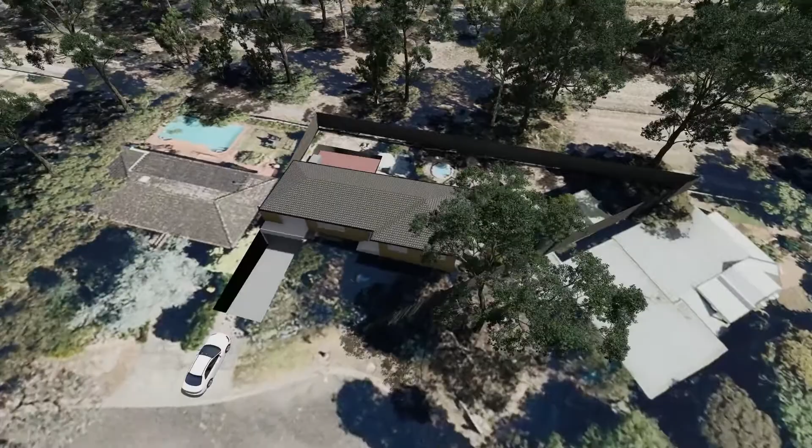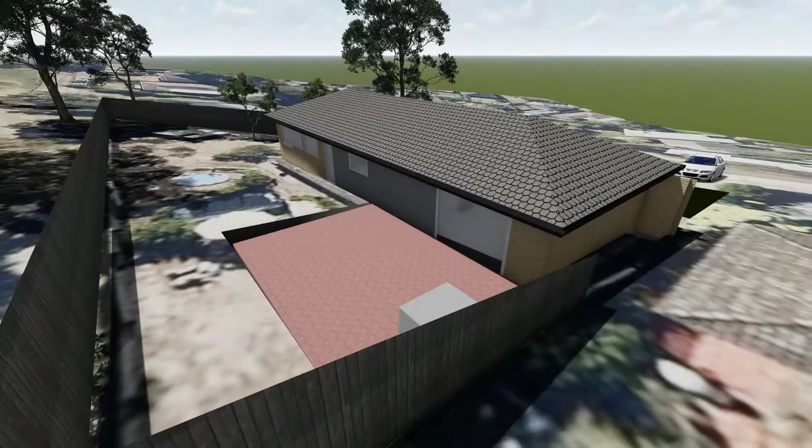Craig, looking down at your current house at the moment, you know this property all too well. Three bedrooms, and then the extra space that's been created downstairs in the garage. So, one of the implications about going up is the plans and the ideas that you've given to me are not quite going to work as nicely and cleanly as you'd like. So we've got a bit of a problem.

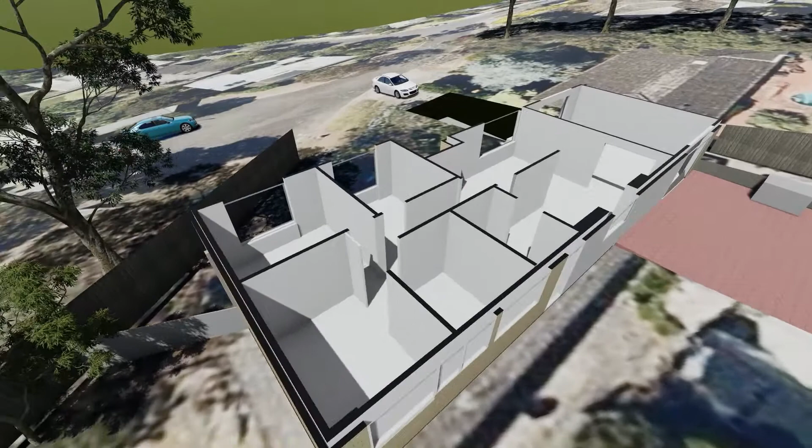Here are the three bedrooms at the end there, Thomas and Talia and Ruby's room. And as you know, Thomas and Ruby's rooms are small. Talia's room is pretty good. 3.5 metres by about 3.2 metres is a good size average bedroom. And if you could make bedrooms bigger than that, then terrific.

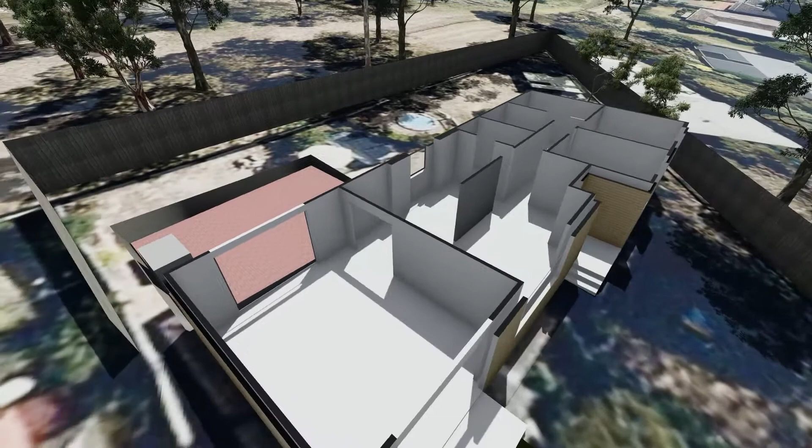The living room's in here and the kitchen, and that wall has now sort of become subject to change with this new design, and I'm going to take you through that in just a second. And one of your ideas was to utilise that giant concrete piece of floor that comes out over the carport and the garage door, and put a set of stairs in there and go around the corner.

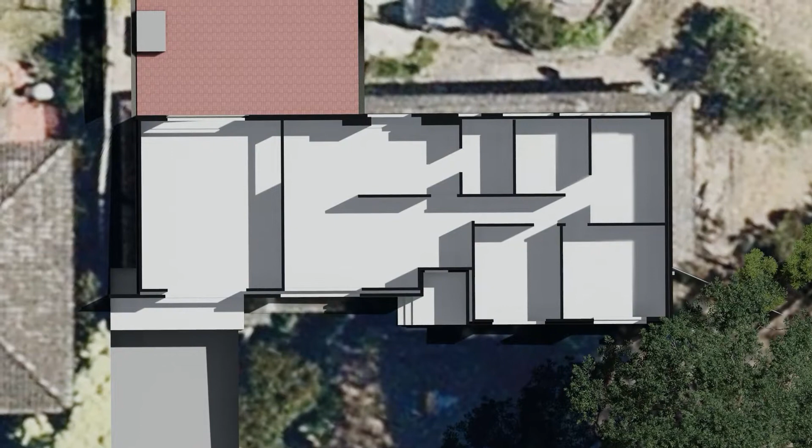But you can see in this plan elevation in the photos here the proximity of the house next door. And I think one of the things that hasn't been considered in that proposal is what the building regulations say as to how close you can build to the boundary. And I'm going to demonstrate that. So what I'm going to do is put the concepts that you've put forward to me into the model and just demonstrate how they can't work.

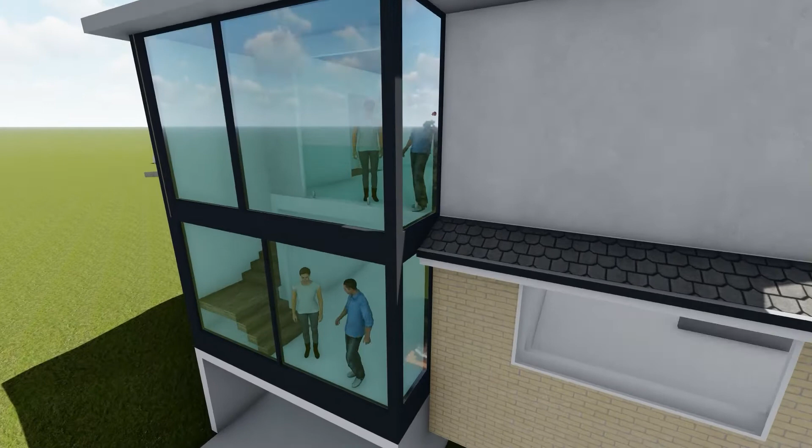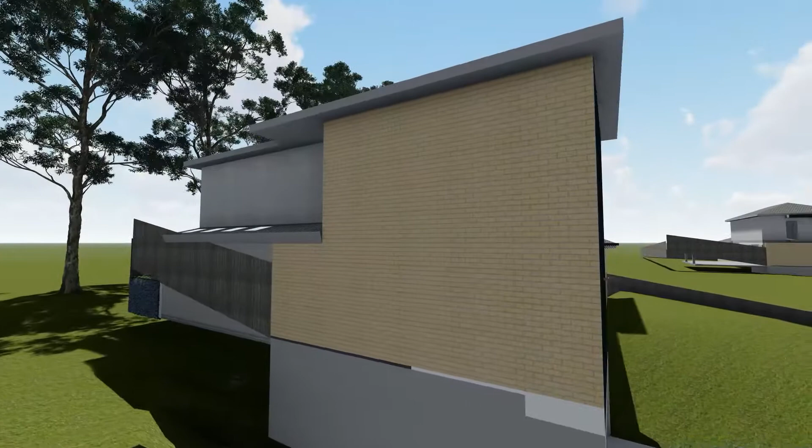So here's the first one where I followed your design. I brought the stairs around the corner, right to the front edge of the garage door there, and you can see I've just gone straight up with windows above the garage and sort of resting on top of that concrete slab. And you can see we've ended up with this giant wall on the boundary. The roof at the moment is hanging over the boundary line. It's a big deal. And then I've come out this way.

This was one of your options with the bedrooms coming out here, and I'll show you why this doesn't work. I mean, it was just too small. It was 5 metres wide, and really that puts the bedrooms at about 2.5 metres wide each, which is really, really tight. In this particular design, what I did was I took the line in the original house and I put the second story back to that line there.

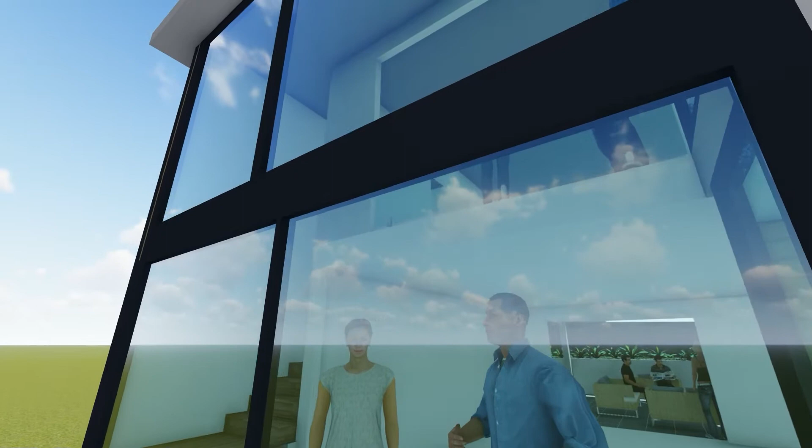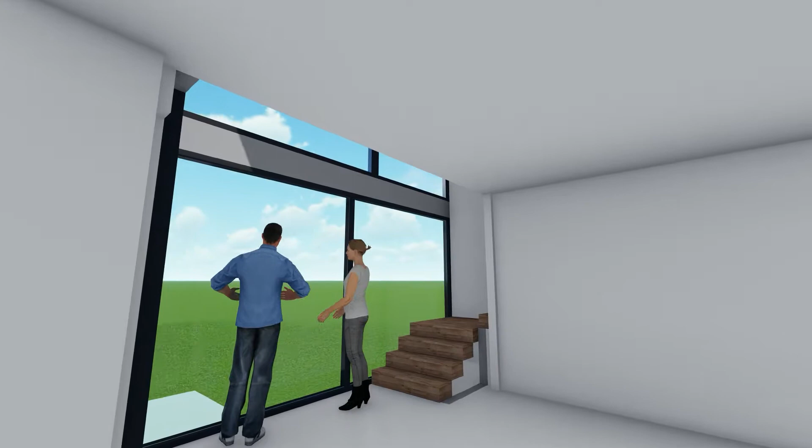So what we've done is we've created this really tall window. So the height of the windows is effectively the two stories. So that just lets loads of light in. And of course, this is the south side of the house. The stairs do their little wrap around the corner here, and what that means is the height at the back of the stairs where it comes into that room is brought forward, is brought south. You can see I've put a glass balustrade up here into that room.

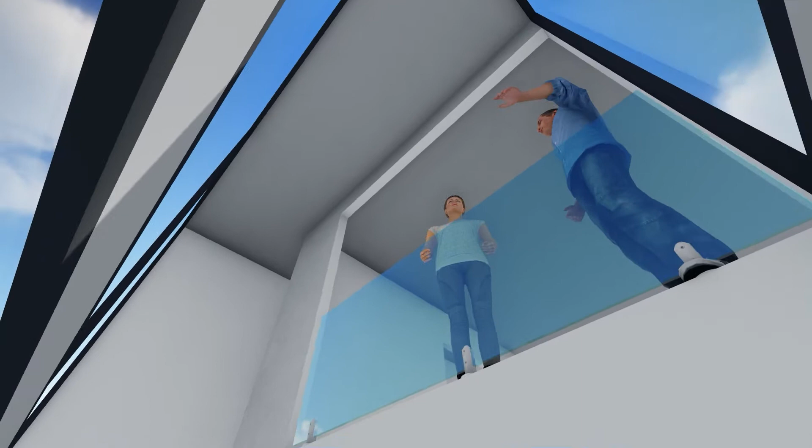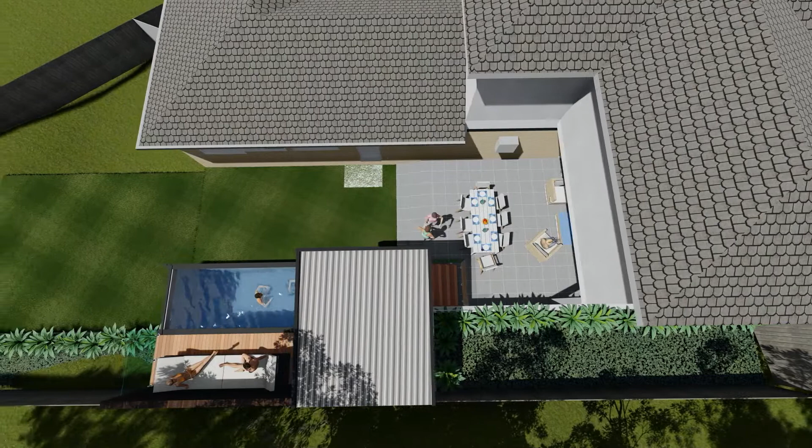Now, there are implications of a design like this with heating and noise and things like that. So I don't know that this is really the best solution. I've left the colours of the bricks and all of that at the moment. I'm gonna show you a new design in a minute.

So then I played with this extension coming out over the alfresco area, and that has implications as well because it meant that it was only going to be 2.5 metres in height. It is the northern side that has a big impact on where light comes into the property.

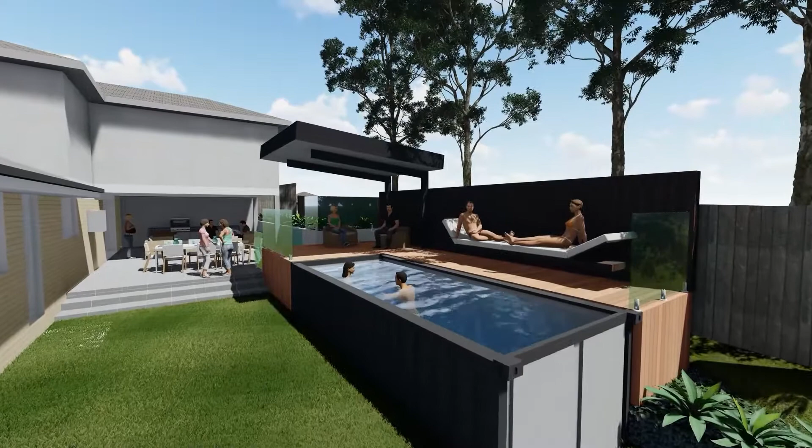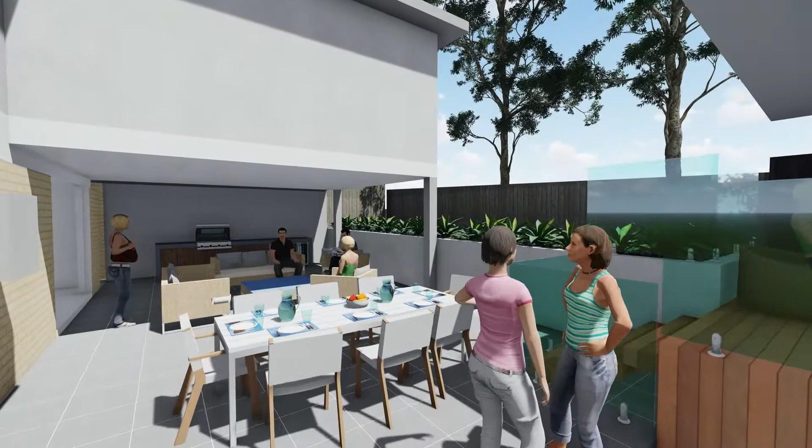I've just started toying around with the idea of the container pool, a little bit of decking on the boundary, 1.8 metre high fence, one of the beautiful timber screens, also sort of blackened out. I've blackened out the container in something like Monument. I've given you this cantilevered shade structure on a decking. Everything is pool fence compliant, really nice big paved area out here. The ability for dining and lounging, outdoor kitchen, all of that sort of stuff.

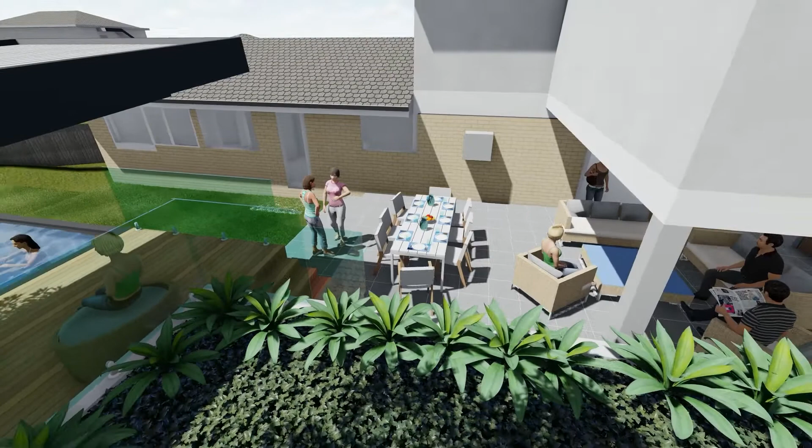The retaining wall there is sitting at about 1.2 metres in height. And then you can see that extension of bedrooms coming out here. But the problem is that this is only going to be 2.5 metres in height, which is quite a low ceiling.

And so there is an implication of bringing the extension out this way, unless we step up somewhere to gain another. We want to get to sort of that 2.7 metre mark. And then I've done another design where we don't have the roof there.

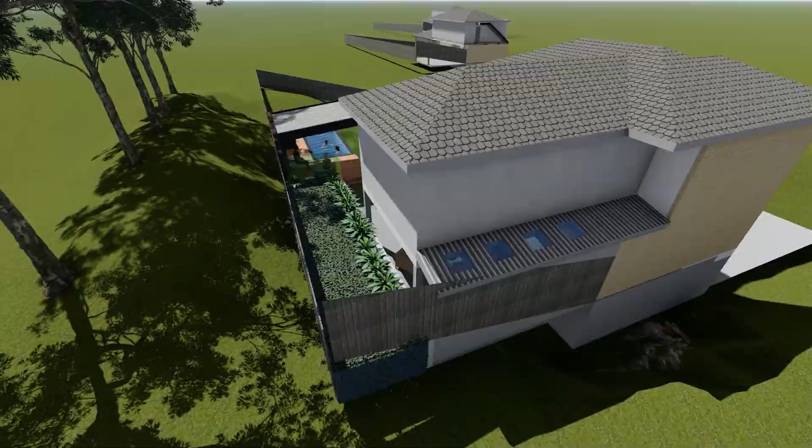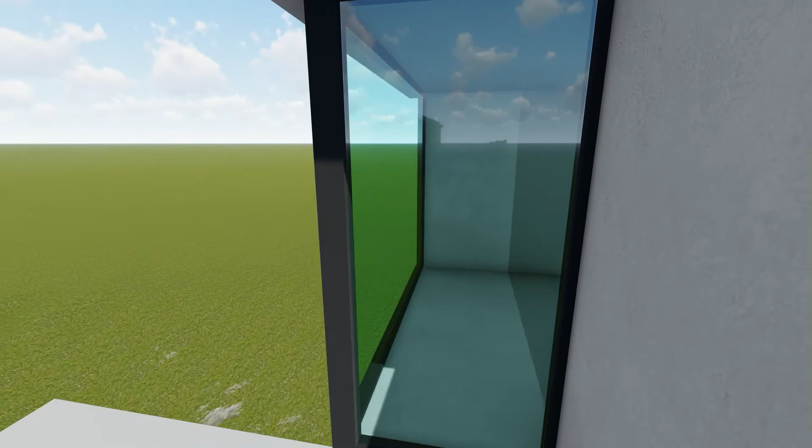So I then came up with a solution to resolve that problem of the heating and the noise, where I brought the second story right to the front window. So you lose that dramatic impact with that giant piece of glass that was coming up to 2 stories in height. But it means that this room comes all the way forward and sits in line with your current balcony, the balcony that sits over the carport entrance. And it just pushes this window out there.

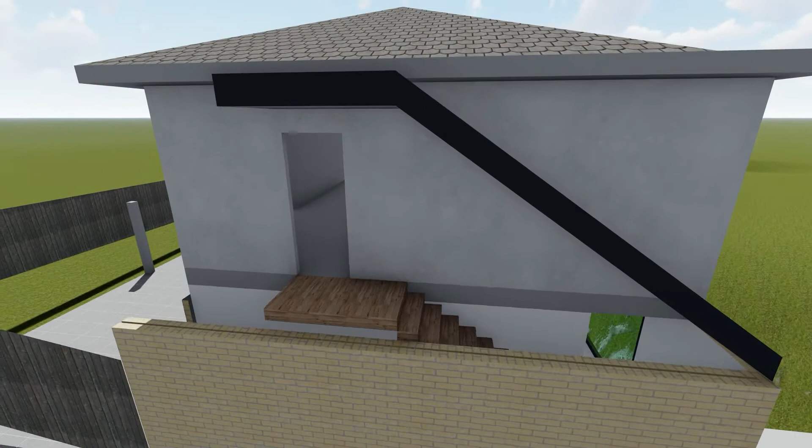And you can see, I'll show you the reasons why I gave up in the end. This is just simply not going to work with access to the side stairs, this wall which is going to go up on the boundary, the roof that we need to put over the staircase, and things like that. I was really hoping that I could get this to work, but in reality, it's not as easy as you might think. I'm close. I just can't get it.

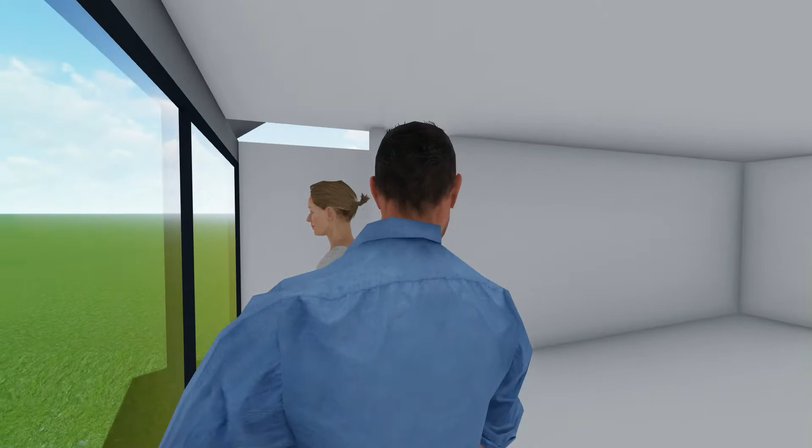So this was a solution where the stairs came around the corner, but you can see the height of the stairs there just doesn't work. So the solution there was to then start the stairs behind the wall. Now that is your existing wall, so there's a brick wall there, and the interior framed out wall with the plaster. And the only way to get the head height to work behind there was to start the staircase on the other side of the wall, and then the ceiling and roof line was going to then follow suit.

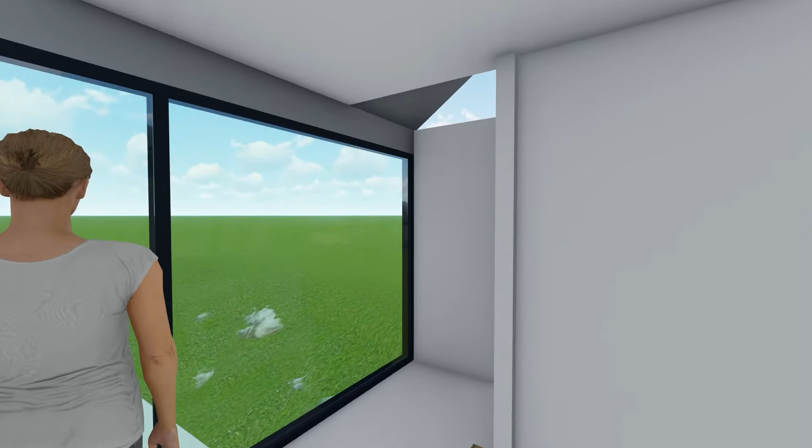The windows that we're looking out here now, and where those people are standing, is that balcony, the current piece of veranda that's out there. And simply the stairs just go straight up to the second story. We put a new wall on the outside. Obviously you've put a roof line that follows the stairs. You come to a landing, you go through a door. So this passage just essentially gets sealed at the top with a door if need be.

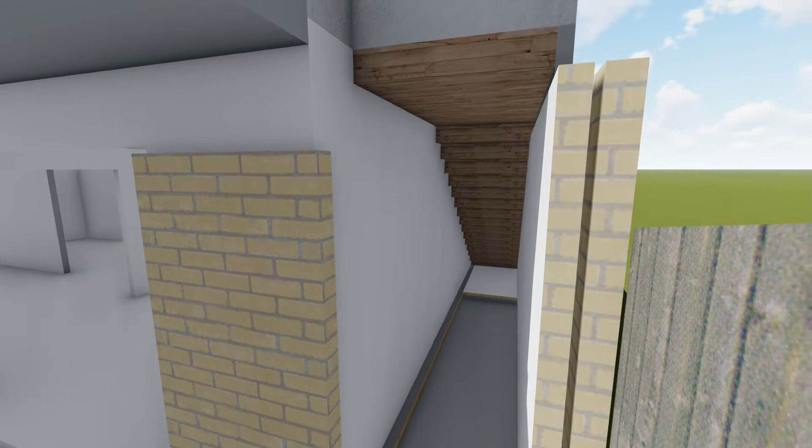I stopped the brick walling at that height. We could put in windows and all of that. But again, it just can't be done because of the rear and side setback regulations. And I was just showing you what would have been left over underneath the stairs in terms of storage space and capacity around the side area here, which would then be covered. But we need to come up with a plan B because this is not going to work.

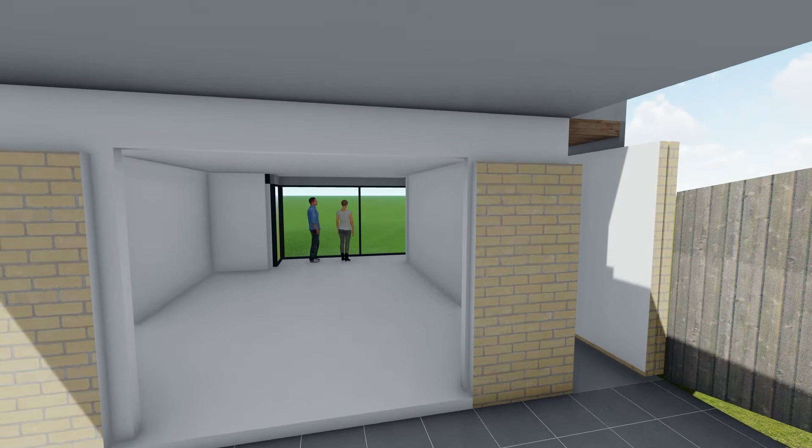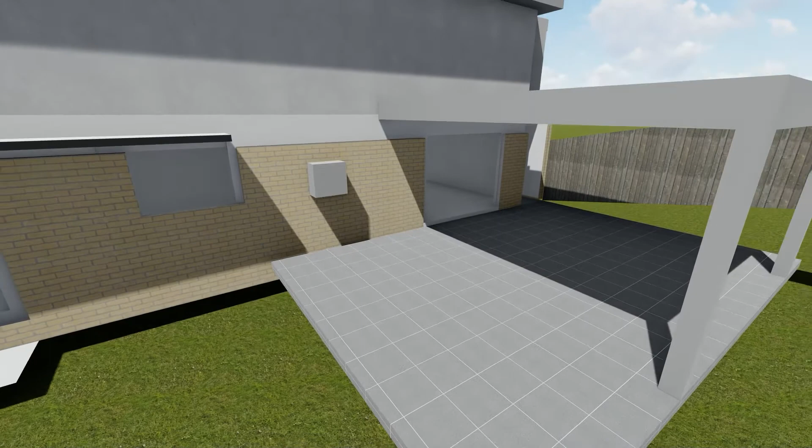The walls along boundaries. So I've redesigned an alfresco space that comes out here, and we do go to the boundary. We can take a wall to the boundary at 3.2 meters in height. It's going to be a maximum of 3.6 meters in height. So we can go 3.2 meters in height to 10 meters along the boundary, plus 25% of the remaining property. So here's my solution to date.

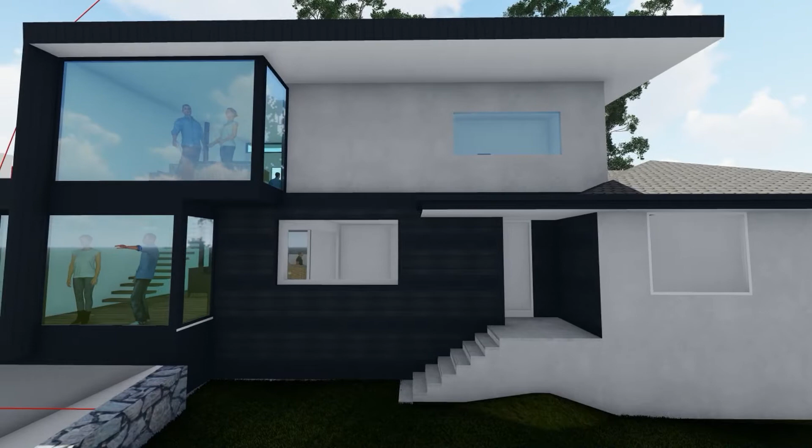So render out all the bricks. I've clad the front in blue stone. It could be granite, it could be a different type of stone. I've gone for quite dramatic kind of blacks and whites and greys. And the drawing that you see here has a series of red lines that come up over the boundary. Now these are the side and rear setback rules. We can't build outside of those red lines. So as the natural ground level goes up, so do these lines.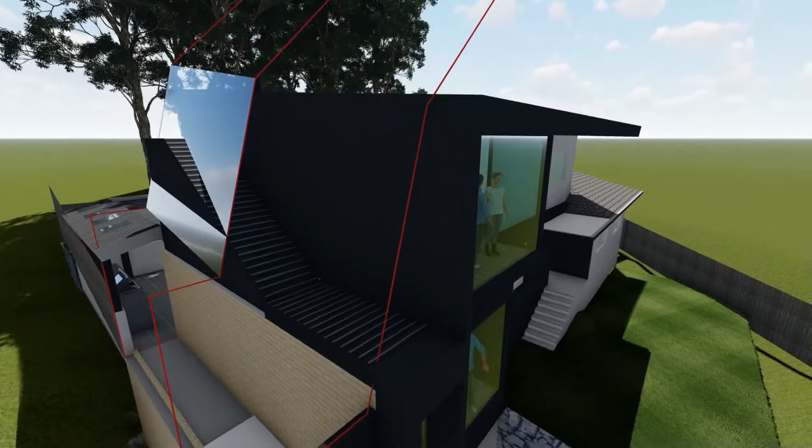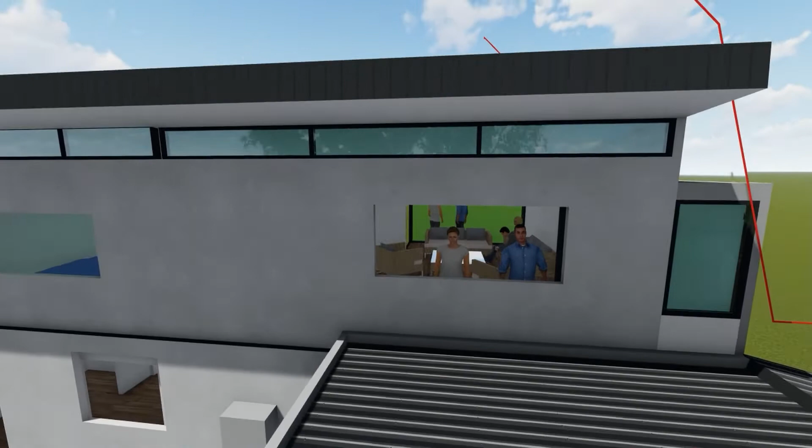You can see there what looks like a big plane of glass, and the roof line sticks out past this plane of glass, and there might be something that we can get dispensation for or do a design alteration. The existing concrete slab that's above your garage is now remaining open. We can talk about what we can do in that space there, but you can see I've now put the alfresco roof and skylights all the way to the boundary, all within the legal limits of what we can build here. It's a skillion roof, pitched up. I want to get glass at the top there, get lots of that northern light into the space.

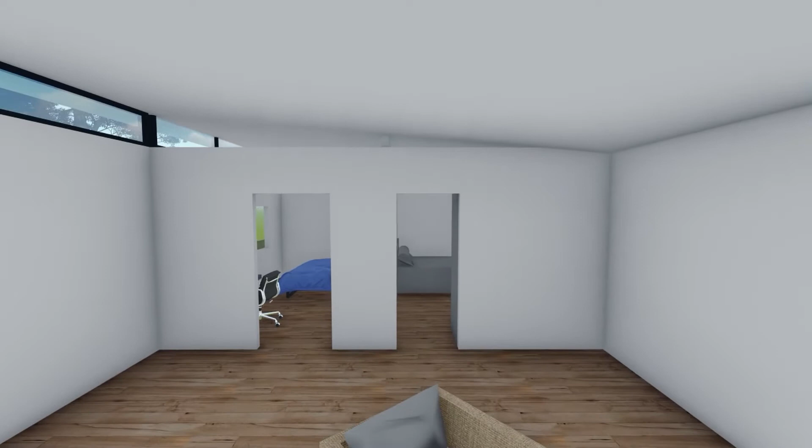The southern end is obviously this window which looks out across into the street. And at this point, I wanted to be able to demonstrate to you, and I've just plonked in a couch, but just what this space could be used for and try and visualize what you could use this for.

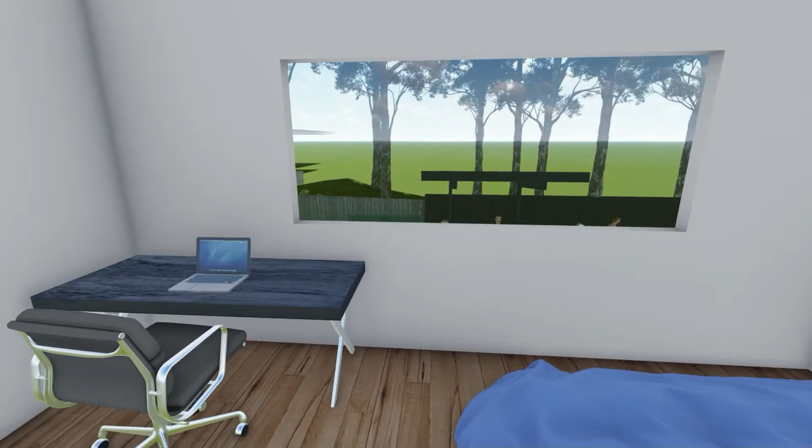I've done 2 bedrooms here, straight down the middle of the room. They're 4.2 by 2.8, I think. So they're long, but they're not very wide. Each of the rooms has a nice big window. This one looks out across to the trees and to the north. The ceiling is raked.

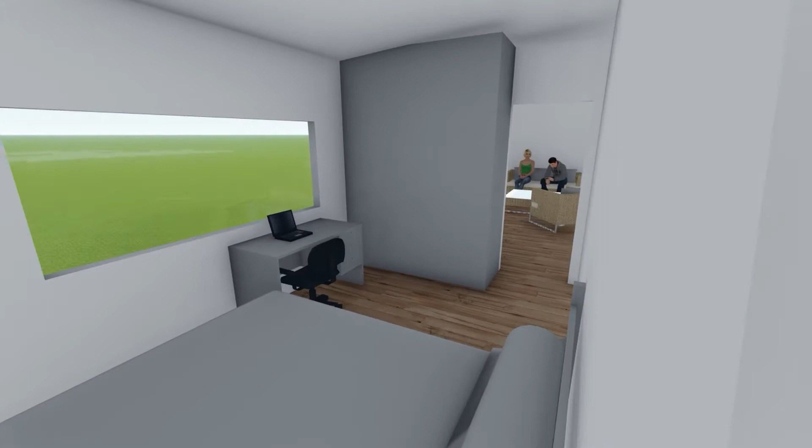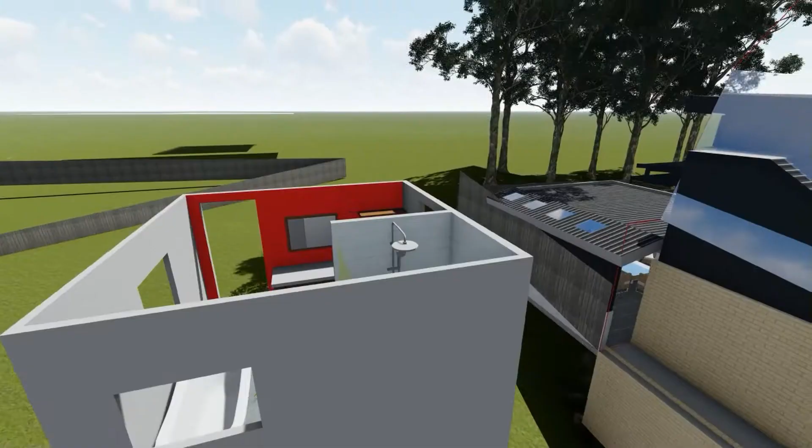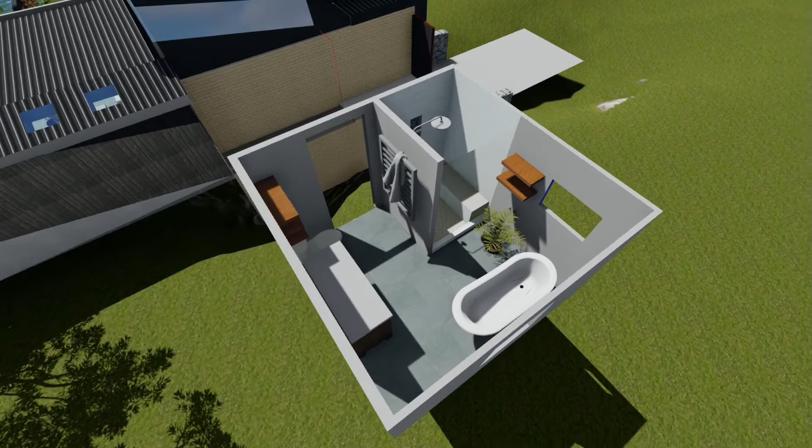So typically, and I've just got this sitting over to the side, the bathroom is going to contain a shower, a toilet, basin. If you've got 2 kids up there, then ideally the basin will be a dual basin. The bath is always optional, nice to have, but this little bathroom that you're looking at here is about 3 metres by 3 metres, which is what we've got to fit into that space up there, which might mean pushing things around. So I just wanted to be able to talk to you at this stage as to how we're going to lay that out.

The alfresco, as I mentioned, comes all the way to the boundary. I've put in this big, quite solid retaining wall all the way to where that pool area is going to sit. We'll come back and talk about that in a second. The rear doors have now gone into sliding doors. They could be bifold doors, and down the side where the existing slab is over the garage, we can do something down that side there.

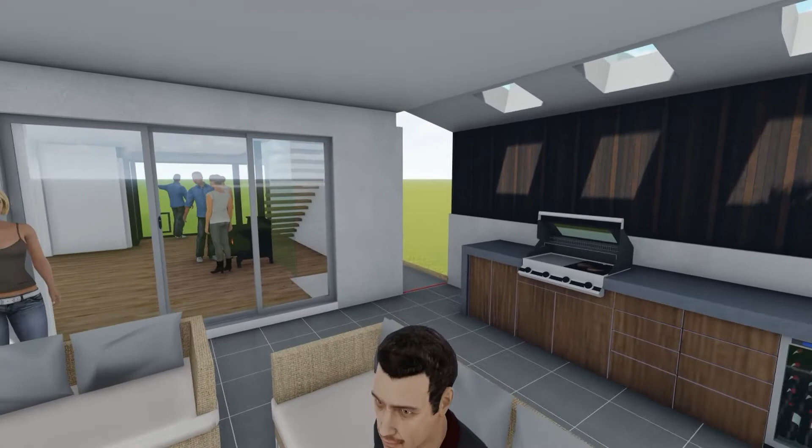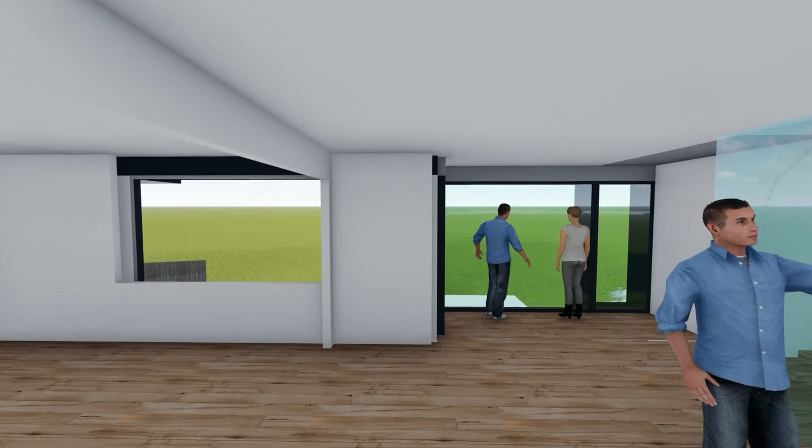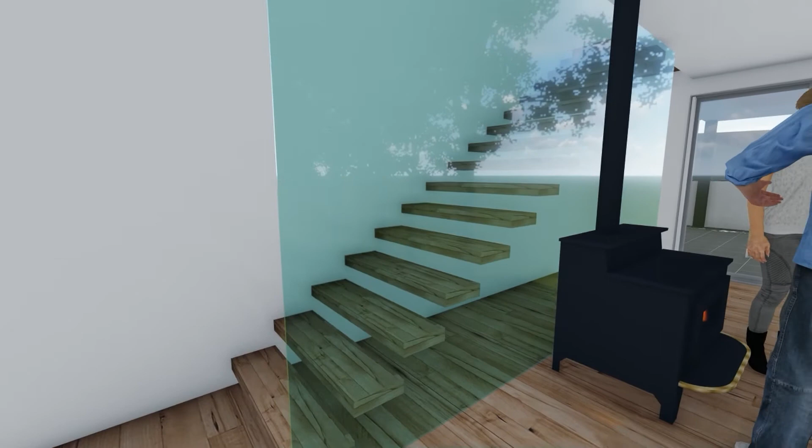So in here, you can see I've run the stairs up the existing wall. The fireplace has had to move forward. This is where we've pushed out over the garage, and the stairs have started. Now I've got a big giant pane of glass here, just as a bit of a design feature, but we will need to put some structural elements in here to support the roof line and that wall up there. So we can talk about how we're going to achieve that.

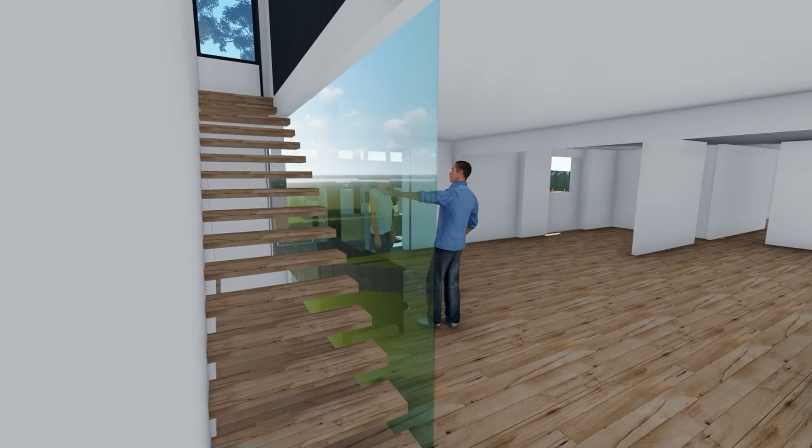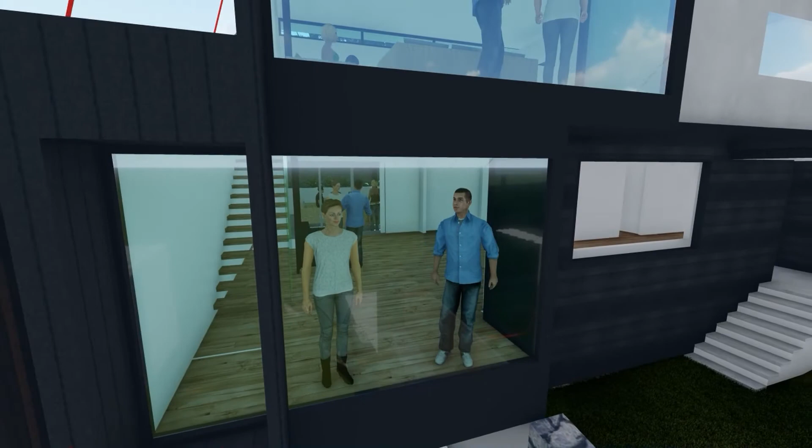And this piece of glass, well, that could just be a solid wall. We could just have the stairs going up behind it. I thought it could be a cool option, but it's all going to come down to cost. The front windows, you can see that upper story is offset to the right, and I've got some funky kind of blades coming down and boxed up a window. So these are just minor design elements that you don't have to have. I can show you lots of different options there.

And we come back to the alfresco area, which now the roof line is sitting at about 2.7 metres in height, and I'd probably get more skylights into here. Again, I'm really conscious of this being the northern side, great for blocking out the hot afternoon sun, but I also want to make sure that we're getting winter light into the property. I think that's really critical, so we'll talk about that.

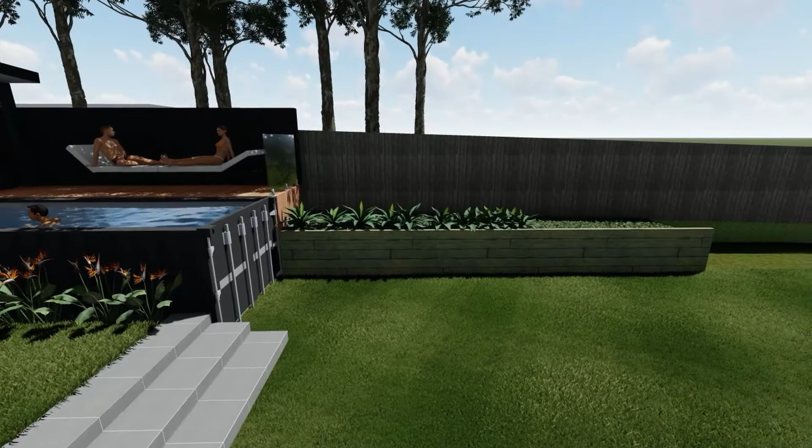And then I've just done paving, steps down to a lawn. You can see the container pool is kind of half sunk in here. So it's 1.2 metres in height. Along here you can get that acrylic edge in that front area there, and then stepping down to just another lawn area, which I've got leveled. You've got sheds down here and veggie patches and all those kinds of things. So I really haven't gone beyond the corner of the house in terms of design work.

So that's just what I wanted to show you, where I've gotten to, the implications and things that still need to be considered, and you need to consider all of this, I guess, as part of the big plan and what the costs are going to be.